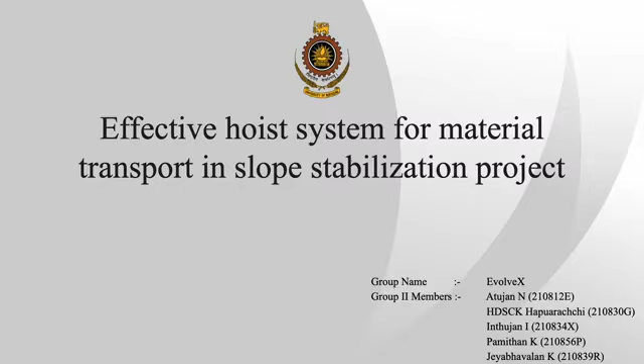In Sri Lanka, hill areas need slope stabilization to prevent landslides. Our selected location is number 147, Ella, between Badulla and Bandarawela railway stations, Badulla district.

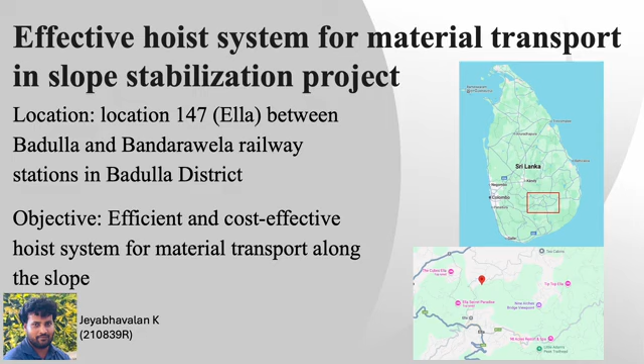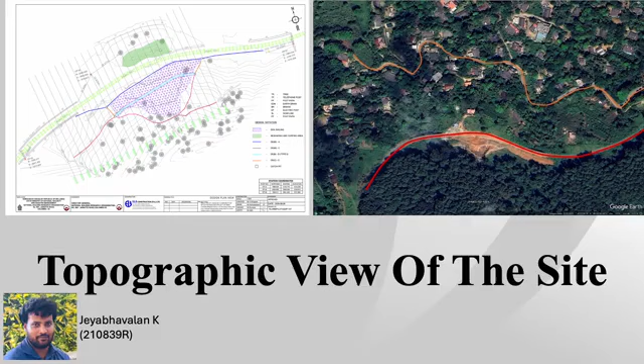The orange line represents public transport using vehicles and the red one is the train track. We can't use vehicles to transport materials to the construction site. We can only use the train to transport materials to the base of the slope. We have to transport those materials to the construction level. That's why we need a hoist system here.

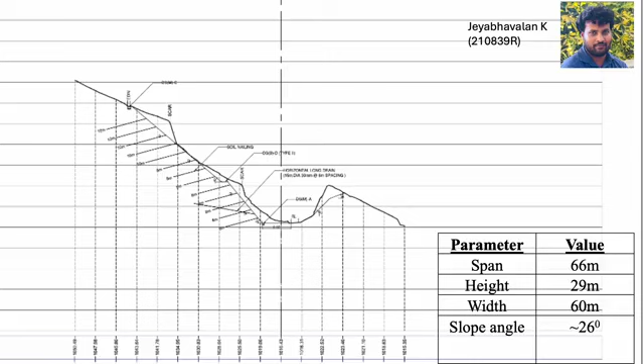Our site conditions by analyzing: plane span 66 meters, height 29 meters, width 60 meters and slope angle 26 degrees. As we mentioned earlier, the site conditions at Damodara make material transport extremely challenging. So to move material safely along the slope, we need a suitable hoisting system. To find the best option, we studied several types of hoisting systems commonly used in slope stabilization work.

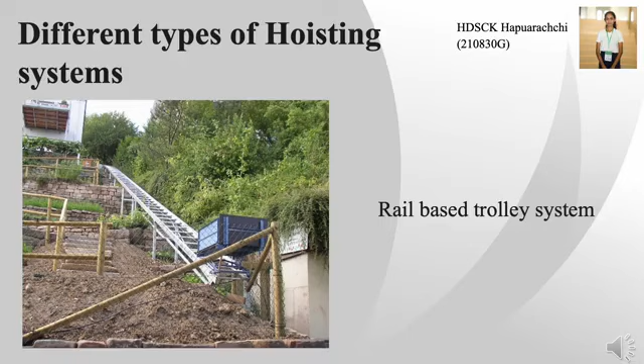The first one is the rail-based hoisting system. These systems use steel rails fixed along the slope with a trolley that moves on the track to transport material. They are quite stable and can carry heavy loads, but the installation is expensive, needs advanced engineering and works only for shorter spans. So in our case, it's not practical.

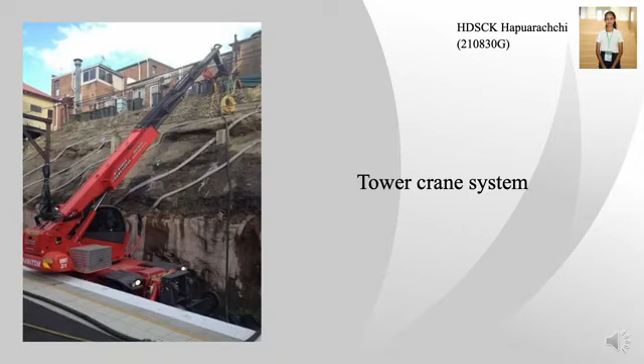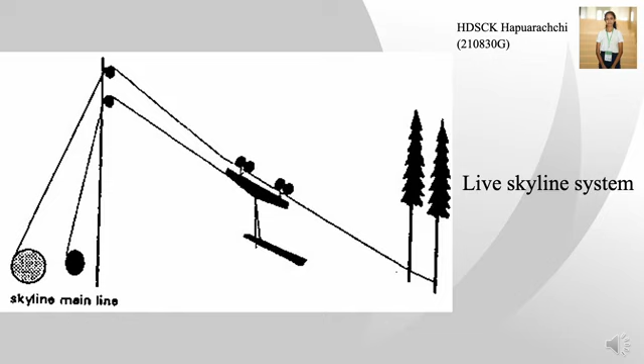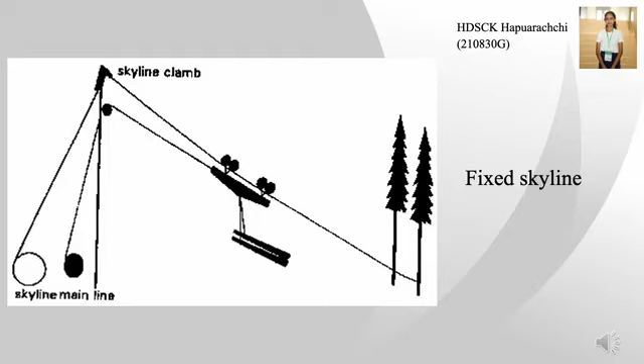We also reviewed other systems like the one rope, two rope, and three rope skyline systems. While the three rope setup provides high stability, it's too expensive and complex for our purpose. The one rope system is a very simple system where a single rope is used to move the load. The load can be moved only in the downward direction under gravity. Because only one rope is used, there is a safety concern, and the one rope system does not meet our design concept.

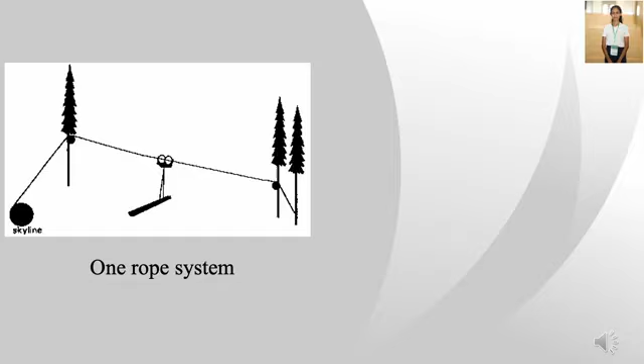After comparing all these systems, considering the slope length, cost, safety, and available resources, we selected the fixed skyline system as the most suitable design solution for our project. Next, let's take a look at the key components and how the design was developed.

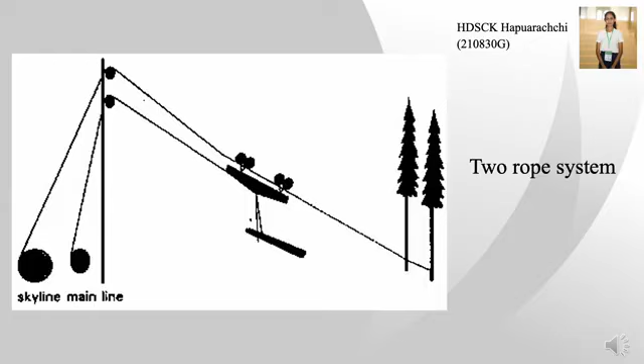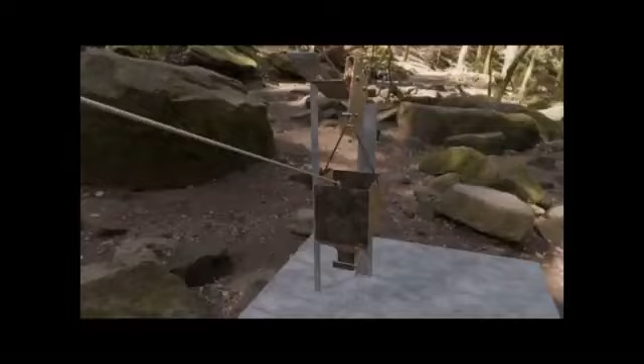Let's come to the design of the two-rope fixed skyline system. We have three parts. The first one is the material loading place. The second one is the unloading place at the top, and the middle support to decrease sagging of the rope. Instead of a conventional pulley, we have a custom pulley design. It has two pulleys connected with a U plate, and the bucket is connected using a hook.

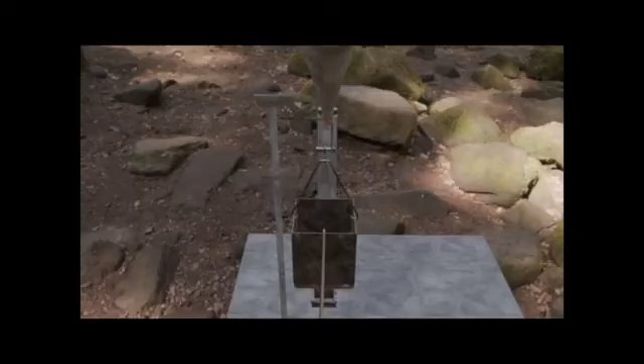You may think, will it flip and fall down? For that, we designed the pulley and bucket so the center of gravity always stays on the left side of the pulley axis. So to stay stable, the system will rotate anti-clockwise, so it won't flip and fall down.

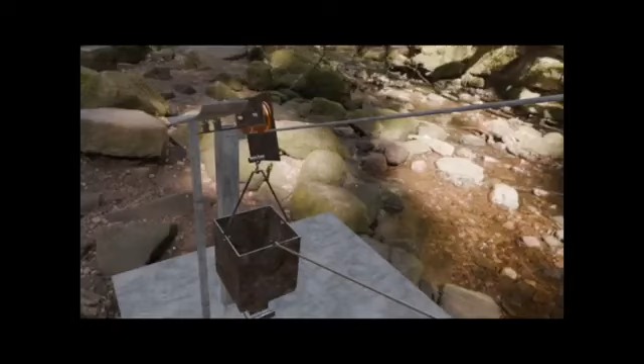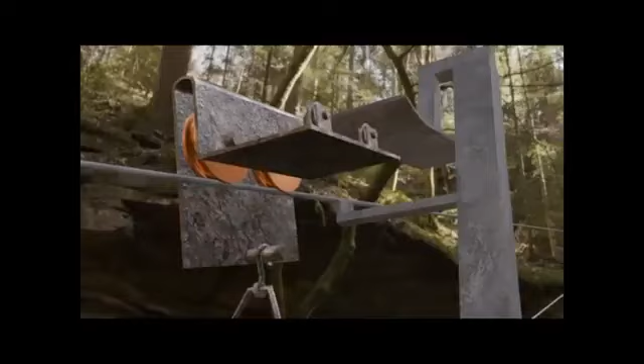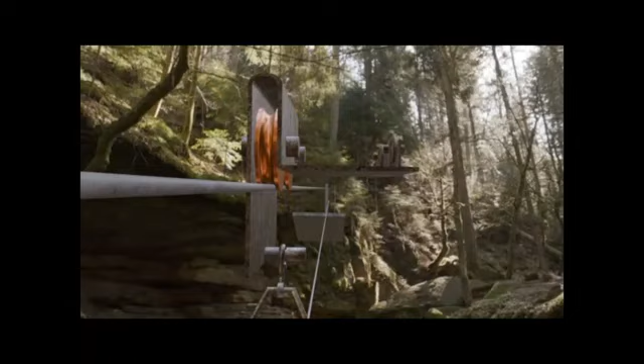Let's come to the middle support. We are using precast concrete beams as support. Here, we are giving the cable a rest, and when it's going over the support, it may wobble. So we are using this skateboard-shaped metal plate to prevent flipping. It will give a force to the downside when the pulley is moving through it, and when it's going through, those small wheels give frictionless movement, so it will not flip.

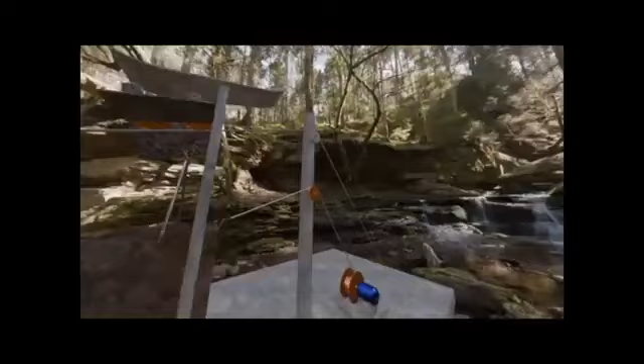This is the third part, the material unloading point. We can get the material out of the bucket using the bottom part of the bucket.

Now let's move on to the design summary of our proposed hoisting system. The system consists of the fixed rope and hauling rope, designed for safe and stable material transport along a 66 meter slope. For the rope selection, we used galvanized steel wire rope with a diameter of 16 mm. This rope provides a breaking load between 110 and 120 kilonewtons, which is sufficient to handle the expected load with

a proper safety margin. Next, the winch system is a single drum electric powered winch operating on a 230 volt AC supply. It has a 2.2 kilowatt motor capable of achieving a hauling speed of 15 meters per minute. The winch includes a forward and reverse switch for simple manual operation.

For pulley components, steel pulleys with a diameter of 200 mm are used. Each pulley has a 30 mm groove and a 25 mm shaft diameter supported by ball bearings to reduce friction and ensure smooth motion. The main frame is a welded mild steel structure designed for rigidity and easy fabrication. A 10 mm plate thickness was selected for sufficient strength while keeping the system lightweight and

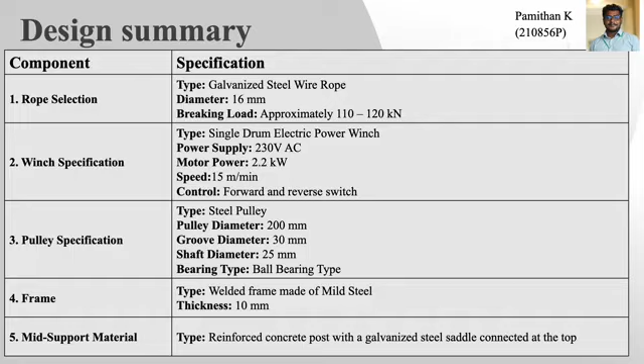cost effective. For the mid support, a reinforced concrete post is used with a galvanized steel saddle at the top. This provides both durability and sufficient stiffness to maintain the rope alignment across the slope. Overall, the selection ensures the system remains low cost, reliable and suitable for the slope stabilization work at Demodara.

The cost analysis was done using current local market prices of materials and equipment available in Sri Lanka. Here is the brief summary of the estimated cost. The total estimated cost of the system is approximately 493,144.44 Sri Lankan rupees, which is significantly lower than most commercially available hoisting systems. This makes it a practical and cost effective solution for small scale slope stabilization projects.

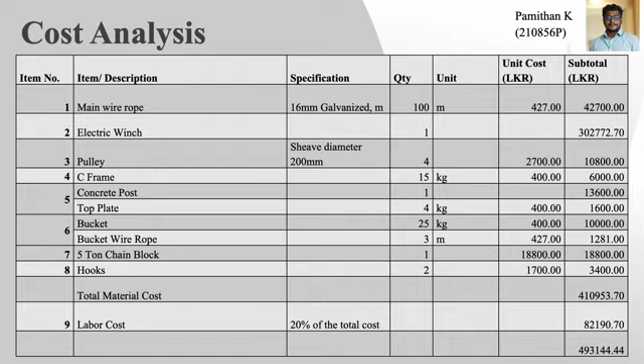Next, we will move on to the conclusion and recommendation section. Compared to normal hoisting systems like tower cranes or rail-based trolleys, our fixed skyline system with mid support is much more practical and valuable for the site. Those systems need large foundations, more space and higher cost, and are not suitable for steep slopes near railway lines.

Our system needs less engineering, less cost and is easier to install even in limited space. It can also be removed and reused for future slope projects after this 1 year soil nailing project. Overall, it gives more value. It's simpler, safer, cheaper and reusable compared to other systems. Compared to other systems, our system is best.

Other than the advantages I mentioned, there are several limitations as well. Load capacity is limited to 200 kg. Manual control: the operator must climb near the winch to press the control button. No emergency stop system if the rope fails.

There are some recommendations that can be added in the future for this system. First, in the future, remote control operation can be added so there is no need to go near the winch. Second, add an emergency catch or brake system to stop the bucket if the rope breaks. Third, introduce automatic tension sensors for safer operation.